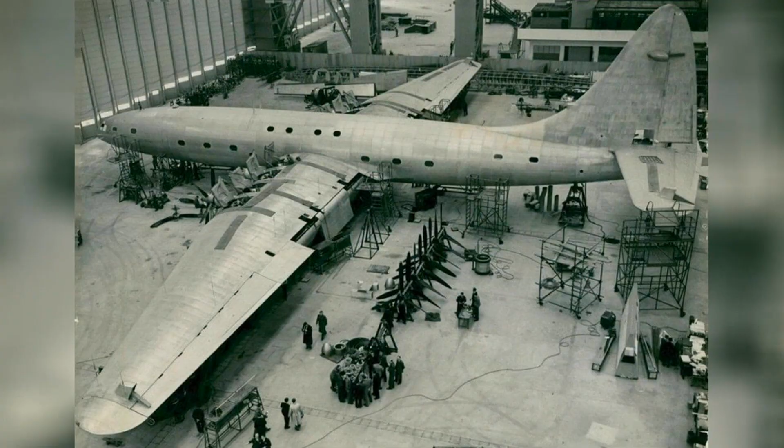The £34 million machine would sell not a single commercial ticket. The problem lay not in assembly defects, but in blind faith in the wrong mathematics.

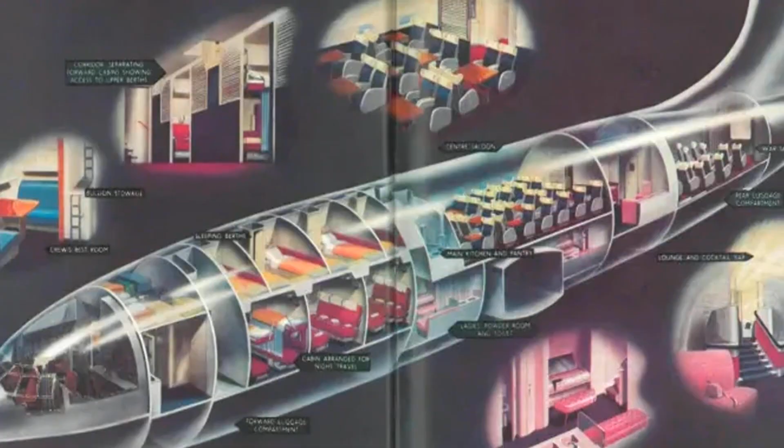In 1942, when Nazi bombs were still falling on the industrial districts of London, head of the government committee John Moore Brabazon received an order to design the post-war British civil fleet. Moore Brabazon, an aristocrat and aviation pioneer, viewed future traffic flows through the lens of pre-war luxury, ignoring the dry economics of costs. In his picture of the world, non-stop transatlantic flights from London to New York were to become the aerial equivalent of ocean liners.

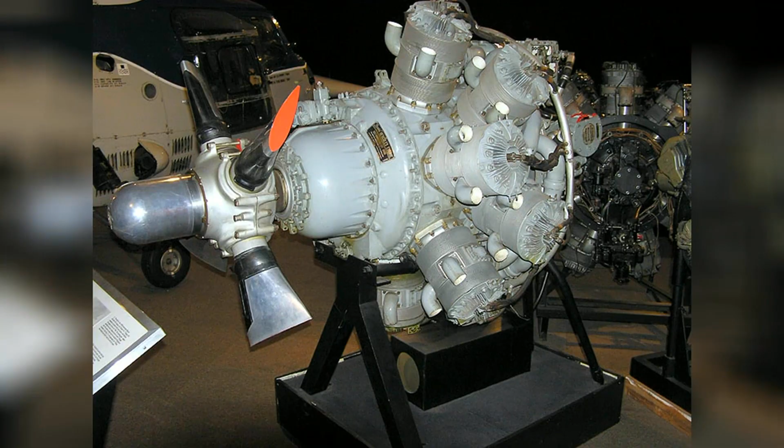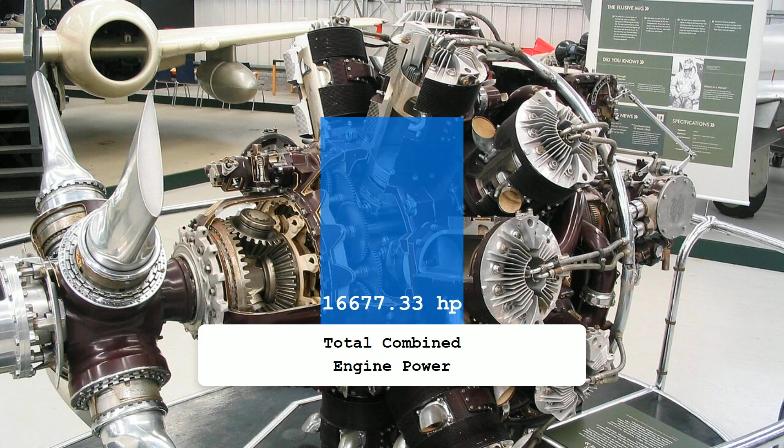The committee approved a specification that called for a giant pressurized tube with a volume of 25,000 cubic feet. Inside the fuselage, it was planned to place sleeping cabins, a full cinema, a bar, and a dining promenade. For 145 tons of takeoff weight, Lord Moore Brabazon allocated a quota of only 100 passenger seats, and this monstrous ratio of dead structural weight to useful commercial payload was financial suicide from the very start.

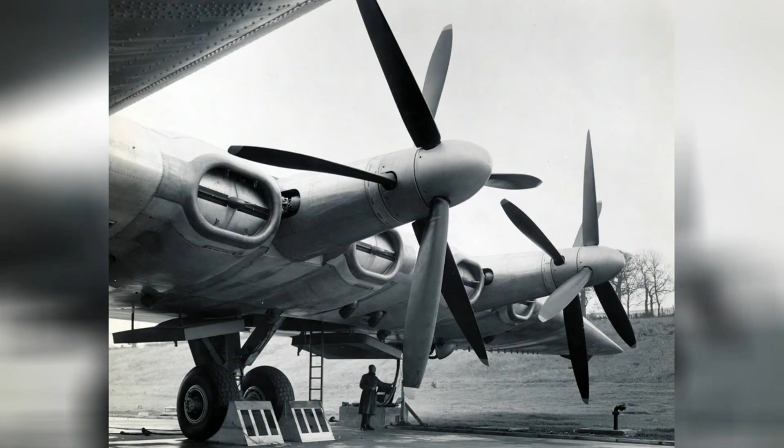Moving 145 tons of metal across the Atlantic Ocean in strong headwinds demanded unprecedented aerodynamic efficiency. Any air resistance forced the engines to burn extra gallons of fuel, and the additional fuel ate into the already meager commercial payload. The traditional layout, with massive engine nacelles hanging under the wing, created far too many turbulent eddies.

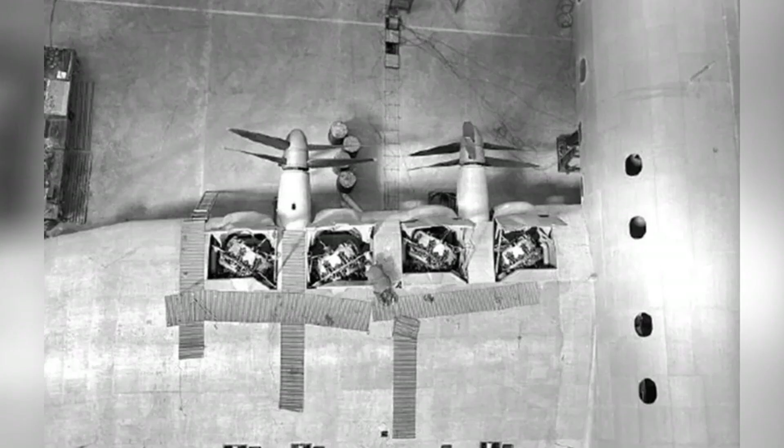The chief designer of the Bristol Aeroplane Company, Archibald Russell, faced an insoluble physical problem. He needed to obtain a total power output exceeding 21,000 horsepower, equal to the thrust of 36 modern supercars, yet keep the wing profile absolutely smooth. Russell adopted a technical solution that would later turn the maintenance inspectors of British Overseas Airways Corporation grey.

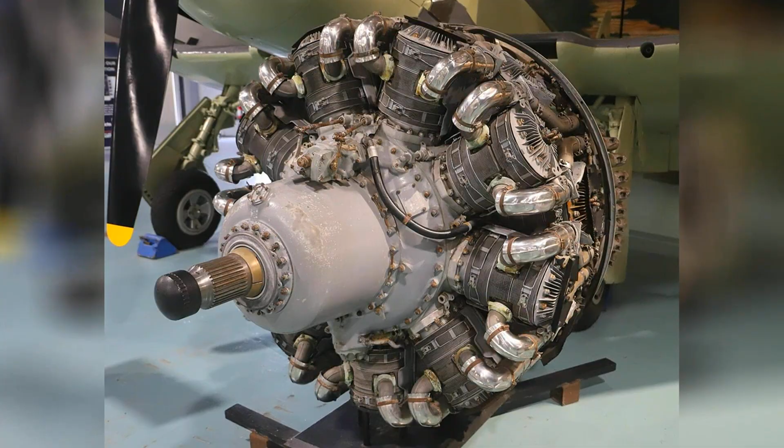He decided to bury all 8 huge radial engines completely inside the wing itself. And it was precisely this complex mechanism for transmitting colossal torque from the hidden recesses to the propellers that would become the time bomb that turned an engineering triumph into a pile of scrap metal.

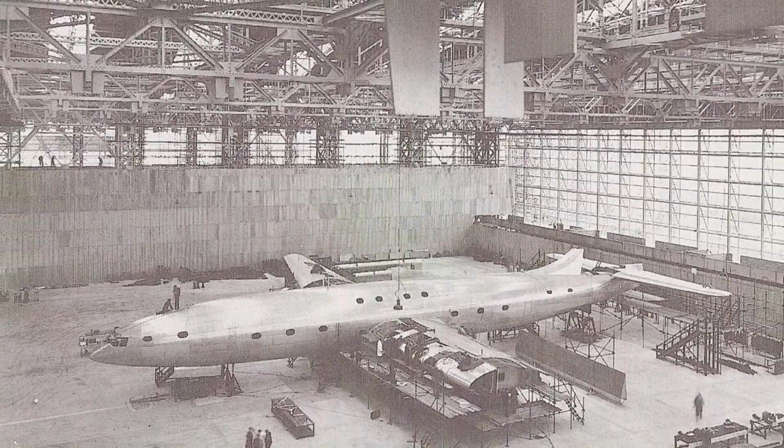Archibald Russell looked at the drawings of a wing profile with a span of 70.1 meters. This distance exceeded the length of a football field and the dimensions of the future Boeing 747. To push through the dense layers of air, a fuselage containing 700 cubic meters of empty space required colossal thrust.

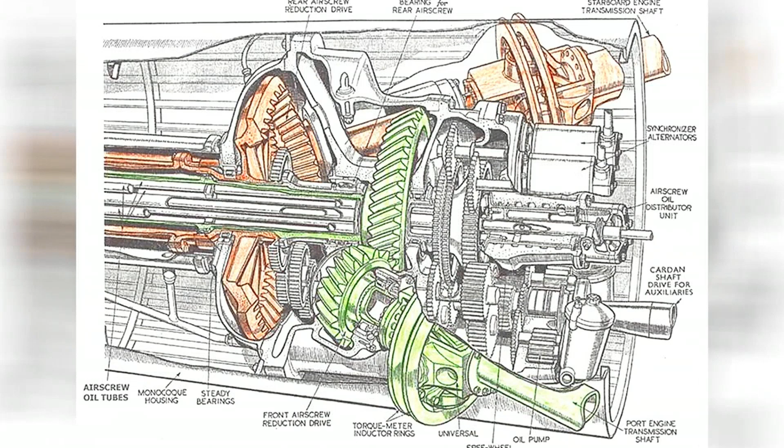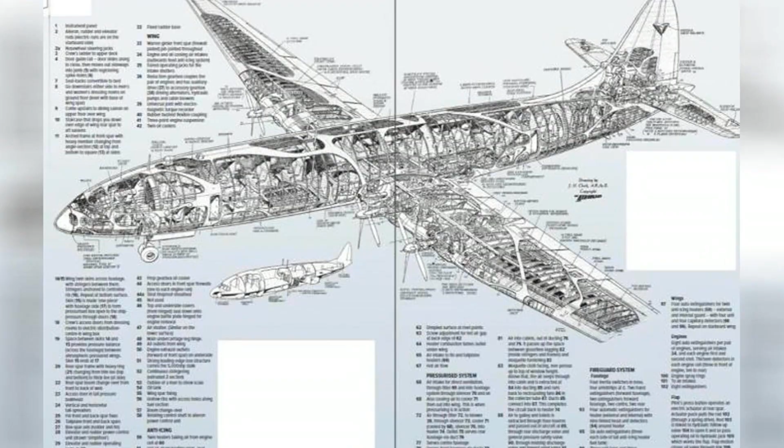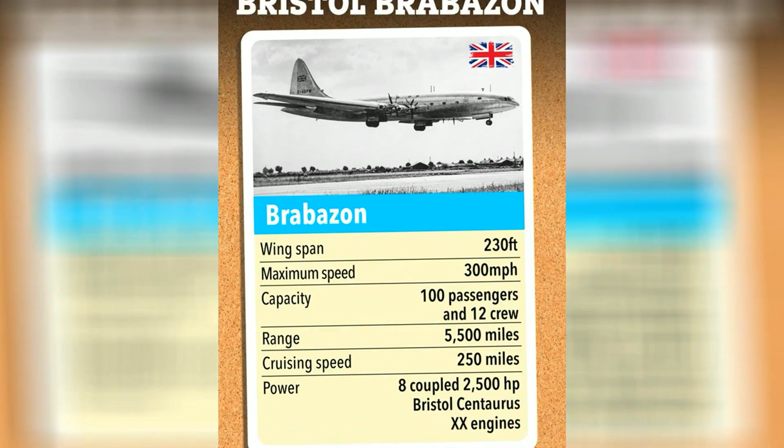Russell chose the Bristol Centaurus 20, 18-cylinder air-cooled radial engines. Each delivered 2,650 horsepower. 8 gigantic units together generated 21,200 horsepower. But they could not simply be hung on external pylons. The traditional layout created aerodynamic drag that forced the engines to burn tons of extra fuel, and fuel directly destroyed the paying commercial payload. Russell made a radical decision.

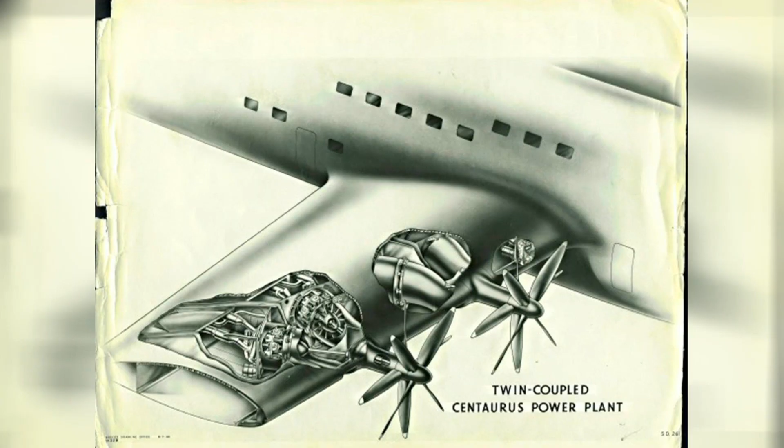He buried these steel consumers of high-octane aviation gasoline deep inside the root section of the wing. The engines stood at angles to one another, forming 4 paired sections. All this primitive mechanical power converged at one point, in a central gearbox weighing several tons.

This complex transmission unit received torque from two independent crankshafts and delivered it to 4 pairs of coaxial contra-rotating propellers. From an engineering standpoint, it was a kinematic masterpiece. The coaxial propellers canceled out the reaction torque and provided ideal directional stability in the event of an engine failure during takeoff. Yet inside the wing, there formed a genuine thermal and mechanical hell.

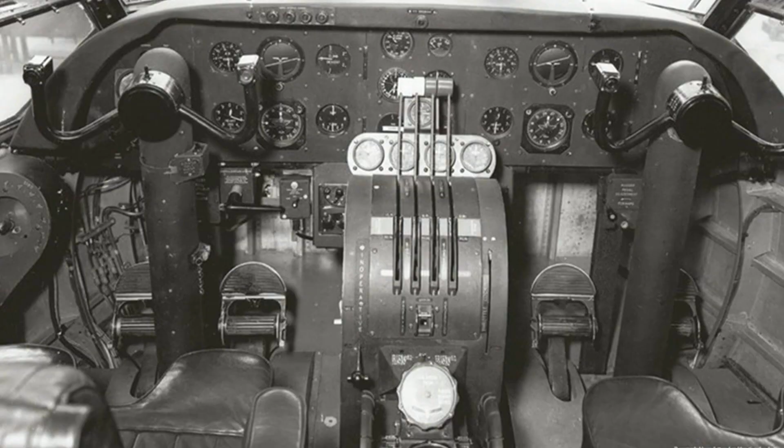144 cylinders produced a monstrous amount of thermal energy. To keep the engines from melting themselves and the load-bearing duralumin spars, Russell laid an intricate network of internal air intakes, controllable shutters, and massive oil coolers. Each isolated engine bay was packed tight, with thousands of moving parts, hundreds of meters of hydraulic lines, and thick cables.

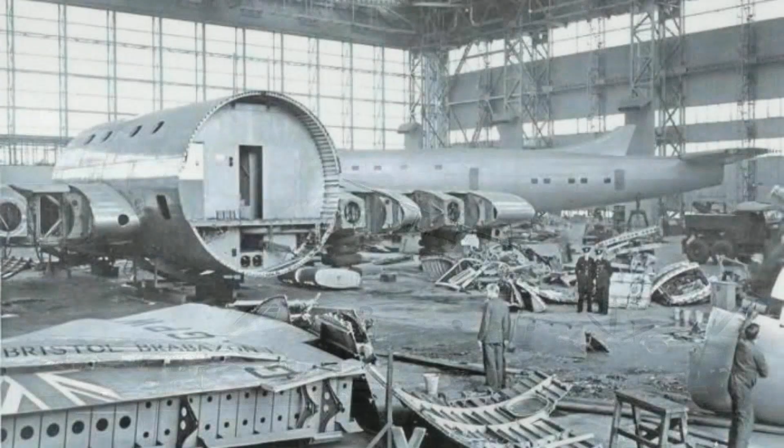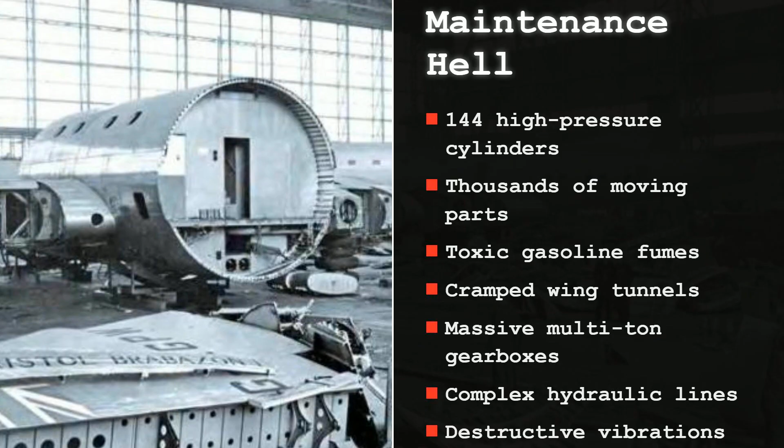Cables were squeezed between the primary structural members of the airframe. The metal vibrated continuously under maximum load, transmitting a destructive low-frequency rumble to the fuselage frames. The massive gearboxes demanded constant lubrication under extreme pressure. The slightest drop in oil pressure threatened instant gear seizure, rupture of the crankcase, and a catastrophic fire inside the confined space of the wing, where adjacent bays held thousands of gallons of flammable fuel.

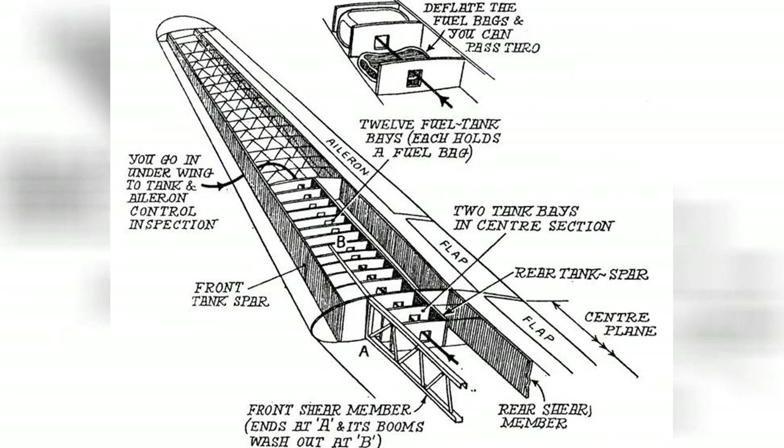While Russell celebrated victory over aerodynamic drag, the Engineering Directorate of British Overseas Airways Corporation studied the maintenance schedules for this Leviathan. The contrast between the flawless wing surface and the harsh reality of ground operations proved to be a death sentence. Under the conventional layout, a mechanic rolled up a ladder, opened the cowlings of an external nacelle, and gained direct physical access to the cylinders and carburetors.

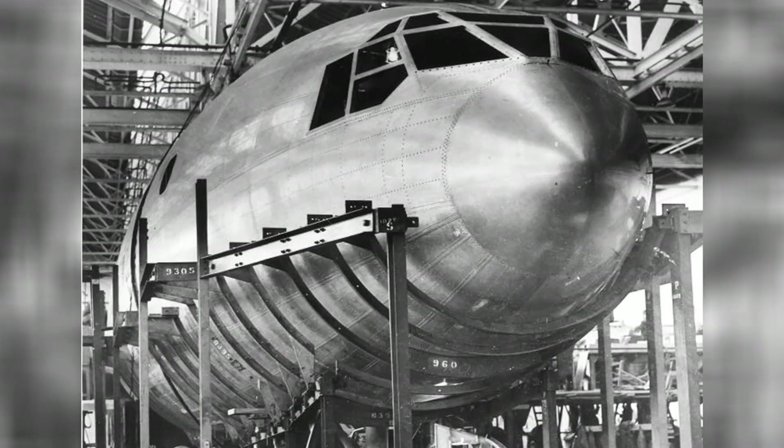To replace burned-out spark plugs on the Bristol Brabazon, a technician faced an exhausting journey deep into the structure. Engineers had to crawl through narrow, dark maintenance tunnels, past the sharp edges of the ribs, dragging heavy tools behind them. They worked in a cramped space saturated with toxic fumes of gasoline and acrid engine oil.

Any serious failure requiring complete engine removal or major gearbox overhaul turned into a major surgical operation. Mechanics had to take off large load-bearing skin panels and use special internal hoists to extract the multi-ton unit without fatally damaging the entire wing structure.

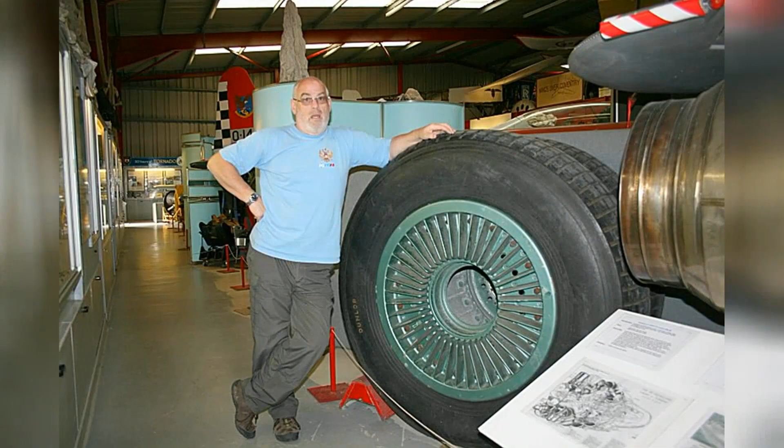In commercial aviation, an airplane earns money only when its landing gear leaves the concrete of the runway. Every minute on the ground is a direct financial loss. The accountants of British Overseas Airways Corporation quickly translated Russell's brilliant engineering compromise into cold columns of figures. Scheduled maintenance of the 144 cylinders and 4 double transmissions hidden inside the wing quadrupled the standard ground inspection time compared with ordinary transport aircraft.

The airplane risked spending long weeks in repair hangars over the slightest leak from a rubber seal or a microscopic crack in a pipe. Depreciation of the machine's colossal cost was spread across a mere 100 tickets sold. And now this was joined by astronomical bills for hundreds of extra man-hours of work by highly qualified technicians. The ideal aerodynamics, for which maintainability had been sacrificed, did not offset even a small fraction of these costs.

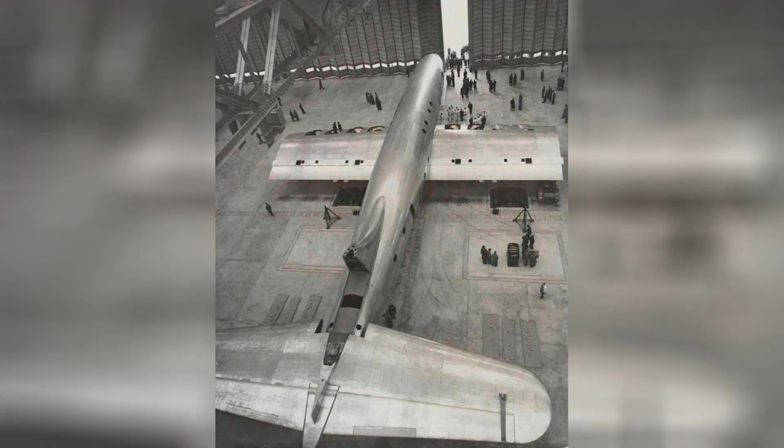Add to this the world's first hydraulic power boost control system, moving the all-metal control surfaces with areas of dozens of square feet at a speed of 250 miles per hour - by the pilot's muscle power alone this was impossible. The innovative system worked flawlessly, but its massive pumps, rigid copper pipelines, redundant circuits, and heavy fluid pressurized to thousands of pounds per square inch added several more critical tons to the airplane's empty weight.

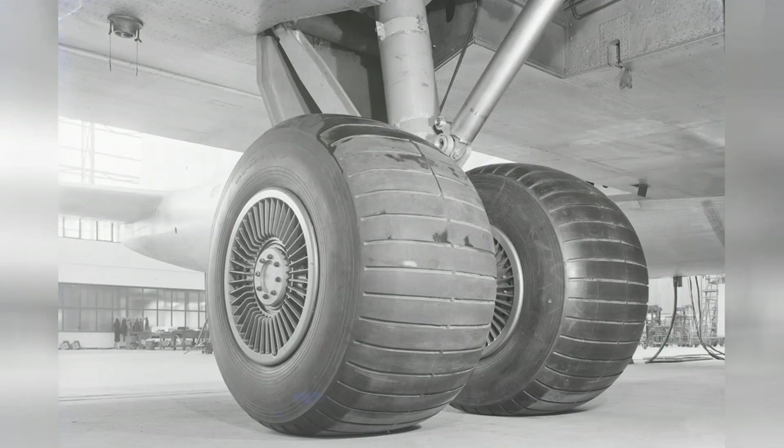The scale of the machine produced a geometric increase in mass, and every extra pound of weight destroyed potential profit without return. Heavy copper wiring bundles running the length of the fuselage, thick duralumin skin designed to maintain excess pressure inside the vast cabin, and ultra-strong landing gear legs consumed what remained of profitability. The pursuit of technical perfection turned the machine into a financial monster.

The rigid logic of detailed drawings defeated the physics of airflow, but surrendered completely to the merciless mathematics of transportation.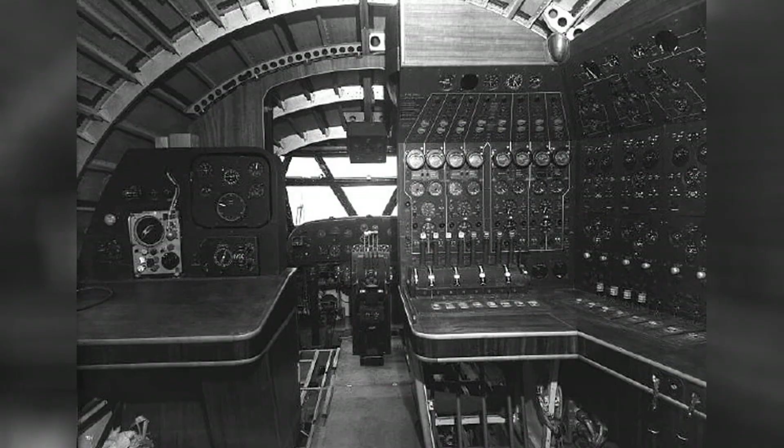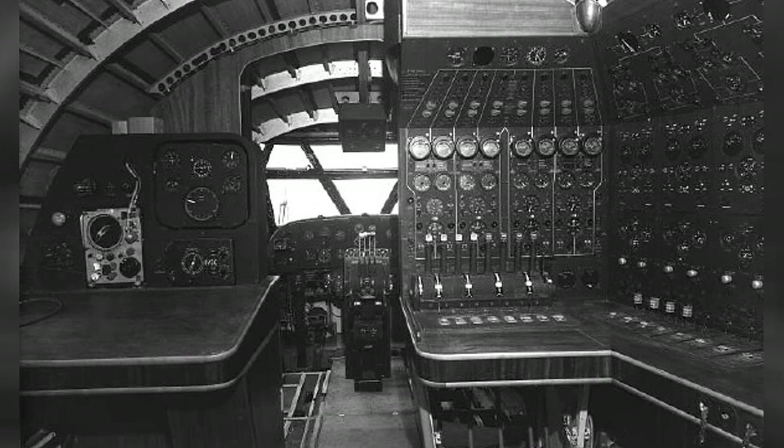On September 4, 1949, Chief Pilot Bill Pegg climbed the tall aluminum boarding stairs into the belly of the world's largest landplane. Behind him, there were neither the sleeping cabins, nor the panoramic cinema, nor the bar counters promised by the project. Throughout the entire colossal fuselage, with a volume of 25,000 cubic feet, reigned the cold emptiness of an industrial laboratory. Instead of 100 wealthy passengers enjoying cocktails over the Atlantic, Pegg carried behind him 1,000 measuring instruments.

A web of hundreds of miles of thick copper cables snaked along the bare duralumin frames, rigidly connecting strain gauges on the wing spars to complex oscilloscopes in the center of the cabin. Massive recorders absorbed second-by-second readings of vibrational loads, hydraulic pulsations, and temperature differentials inside the hidden engine bays. Mounting this complex instrumentation alone required thousands of man-hours of technician work.

It was not a luxurious Skyliner, but a 145-ton test rig for metal fatigue. Taxpayers paid £3.4 million for an illusion that on paper promised unheard-of luxury and turned out to be the echo of engineers' footsteps on bare, ribbed floors.

Bill Pegg settled into the left seat in the cockpit, whose width surpassed the dimensions of a standard London double-decker bus. Directly ahead stretched the concrete runway 7,900 feet long, for the pouring of which bulldozers had leveled the village of Charlton. Pegg placed his hand on the 8 throttle levers and smoothly advanced them. Deep inside the 230-foot wing, 144 forged pistons came to life simultaneously.

21,200 horsepower poured their monstrous torque into the complex transmission gearboxes. Eight coaxial propellers roared and bit into the damp autumn air. The low-frequency rumble passed through thousands of riveted skin panels, but thanks to the Leviathan's colossal mass, vibration in the crew cabin remained minimal.

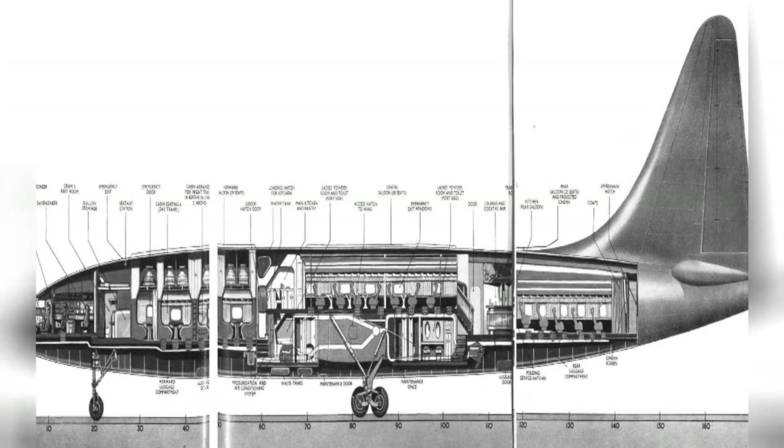The machine, with a maximum takeoff weight of 145 tons, lifted heavily from the concrete with frightening mechanical grace. The first fully hydraulic booster system operated flawlessly. The pilot did not have to fight the aerodynamic resistance of the huge all-metal control surfaces. The heavy, non-flammable fluid, pressurized to thousands of pounds per square inch, did the heavy work for human muscles.

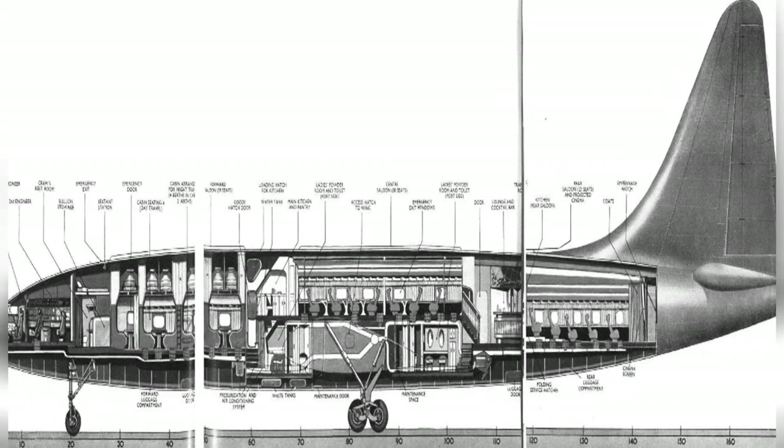Every movement of the ailerons generated enormous loads on the center section structural members, but the ingenious lever system compensated for the deformations. The historic flight lasted exactly 25 minutes. Upon returning to Earth, the chief pilot recorded not a single hydraulic failure, not a single drop in oil pressure, not a single pulsation in the transmissions. The giant piece of metal flew flawlessly.

In June 1950, the Bristol Brabazon passed with a deafening triumph over the runways of London's Heathrow Airport, and a year later demonstrated its power at the Paris Air Show in Le Bourget. Crowds of spectators gazed spellbound at the sky, convinced they were seeing the flagship of the future air fleet of the British Empire. The enormous silver silhouette, slicing through the air at a cruising speed of 250 miles per hour at an altitude of 25,000 feet, seemed an indisputable embodiment of British engineering genius.

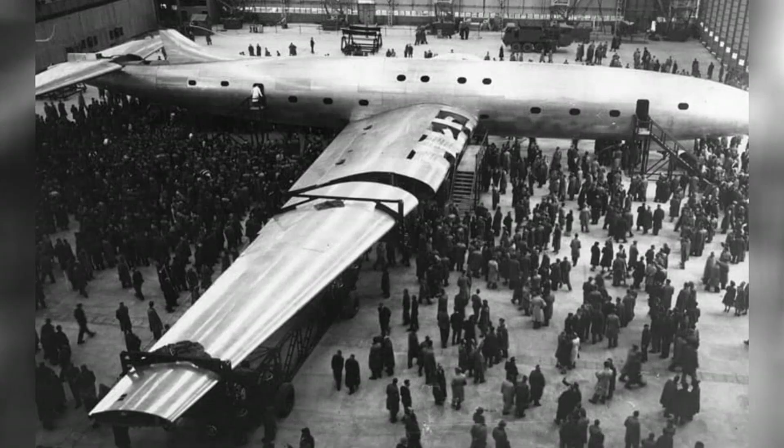But while the morning newspapers printed rapturous headlines, in the offices of the Ministry of Supply and at the headquarters of British Overseas Airways Corporation, a brutal collision with reality was taking place. Profitability was measured not by loud applause from the crowd, but by the cost of every gallon of fuel burned per ton of useful payload. The airline's financial directors and analysts looked not at the flawless contours of the fuselage, but at the cold columns of commercial operating metrics.

They already knew precisely what was being carefully hidden from the jubilant public: this perfect mechanism would never enter regular passenger service. Economic mathematics had delivered a verdict that left no chance of saving the project. To grasp the true scale of the impending financial catastrophe, the leaders of British Overseas Airways Corporation only needed to divide the airplane's takeoff weight by the number of tickets sold.

145 tons of alloyed aluminum, copper, and steel had to rise into the air, burning tons of aviation gasoline in order to carry just 100 people across the ocean. To achieve break-even on a flight, tickets for the Bristol Brabazon would have to cost three times more than those on competitors' flights. But even that sky-high price could not have covered the monstrous costs of maintaining the radial engines hidden inside the cramped wings.

Every extra pound of weight inexorably took precious pounds sterling out of the carrier's pocket, turning the transatlantic route into a budgetary black hole. Lord Moore Brabazon's elitist concept, which naively assumed that air travel would remain the privilege of a super-rich aristocracy demanding private berths on board, shattered against the laws of the market. The new reality demanded extremely dense seating arrangements and high flight frequency.

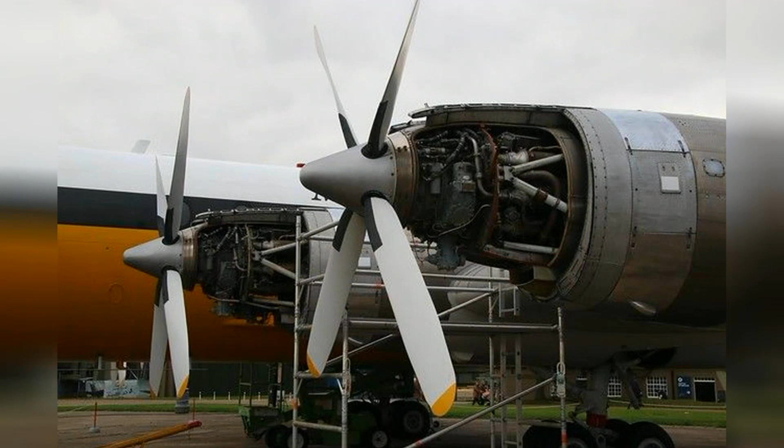On paper, the turboprop giant looked like the last real hope of recovering the millions of pounds sterling invested in infrastructure and development. Inside the giant assembly shop in Filton, under a roof covering 8 acres, the riveted skeleton of a new, enormous fuselage was already taking shape, into which hundreds of tons of scarce alloyed duralumin had gone. But the dry financial analysis that the corporation's chief accountant placed on the table in front of Miles Thomas left no room for illusions.

Even with the new engines, the giant airplane remained hostage to its absurd concept. Replacing piston cylinders with rapidly spinning gas turbine blades had not changed the machine's fundamental flaw. 700 cubic meters of pressurized volume were still intended to carry a tiny handful of people.

Sir Miles Thomas took a fountain pen in his hand and drew a line through the most expensive British aviation project. He officially notified the Ministry of Supply that British Overseas Airways Corporation categorically refused to purchase either the piston-engined first model or the unfinished turboprop second model.

This was not an act of sabotage. It was an inevitable capitulation before the harsh laws of economics.

By this time, the de Havilland Comet was already roaring through the sky, the world's first commercial jet airliner. It weighed 3 times less than the unwieldy 145-ton Bristol Brabazon, sliced through the stratosphere at 500 miles per hour, and carried a tightly packed load of 36 passengers, delivering incredible commercial turnover per flight. The future belonged not to luxurious flying palaces with sleeping cabins, but to narrow duralumin tubes with dense rows of seats in which people were willing to endure cramped conditions for the sake of speed.

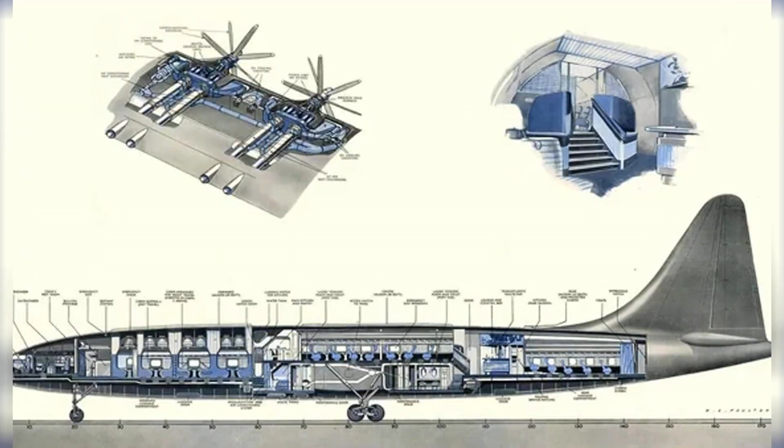Workers started the compressors, switched on pneumatic shears and heavy gas cutters. They began methodically destroying what had been the pinnacle of Archibald Russell's engineering thought. Sharp steel blades bit into the thick duralumin skin, forever tearing apart the perfect aerodynamic profile of the enormous 230-foot wing. The complex, massive central gearboxes, for which first-class technicians had crawled for days through the toxic confines of the internal engine bays, were roughly torn from the load-bearing spars and dumped onto the oil-stained concrete.

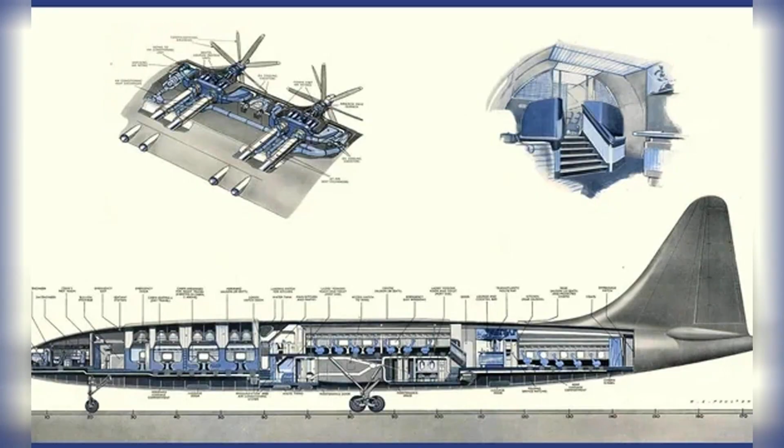Hundreds of miles of costly copper wiring, vibration-strain sensors, and precision measuring instruments were thrown onto piles of industrial waste. 8 giant Bristol Centaurus 20 radial engines, each rated at 2,650 horsepower, were sent to government storage as spare parts, while 145 tons of high-grade aircraft alloy were sold to scrap processors at the price of ordinary secondary metal.

In the neighbouring giant hangar, the half-assembled skeleton of the second turboprop version met exactly the same brutal fate. The point of no return had been passed, finally and irrevocably. Lord John Moore Brabazon's vision of a luxurious aerial ocean liner turned into a shapeless heap of cut aluminium. The only tangible legacy of the £34 million remained the colossal concrete runway,

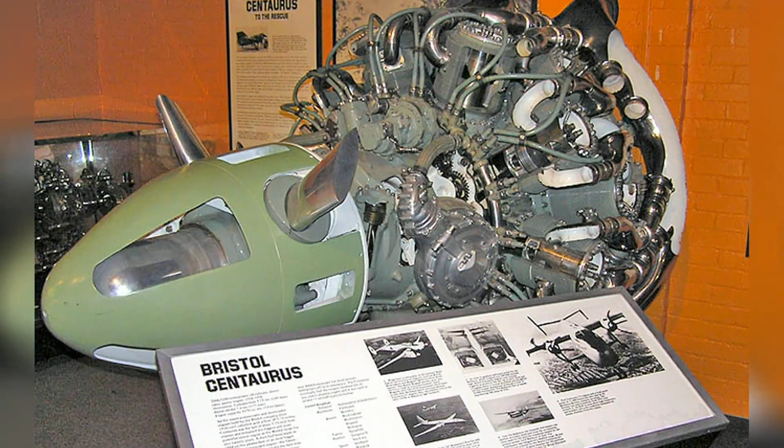7,900 feet long, on the site of the village of Charlton, that had been erased from the face of the earth, and the giant assembly shop covering 8 acres. By a cruel twist of fate, this massive and extremely expensive infrastructure proved highly useful.

Decades later, it was from this thick concrete that British supersonic Concorde airliners and heavy strategic Vulcan bombers would take off. The Bristol Brabazon project was ruthlessly wiped from the face of the earth, leaving behind only the cold, mathematical conclusion about the end of an entire era.

Whitney Straight, managing director of British Overseas Airways Corporation, hated illusions. In 1950, his desk was piled with dry reports on fuel consumption.

Lord John Moore Brabazon's project called for a non-stop transatlantic flight, yet the physics of the atmosphere over the North Atlantic imposed harsh conditions. At an altitude of 25,000 feet, the jet stream prevailed, a dense flow of opposing westerly wind exceeding 100 miles per hour.

To punch through this wall of air, the 145-ton Bristol Brabazon had to deliver maximum cruise power. 8 Bristol Centaurus 20 radial engines, hidden inside the cramped wings, ran on high-octane gasoline. Each of the 144 pistons required continuous injection of the mixture.

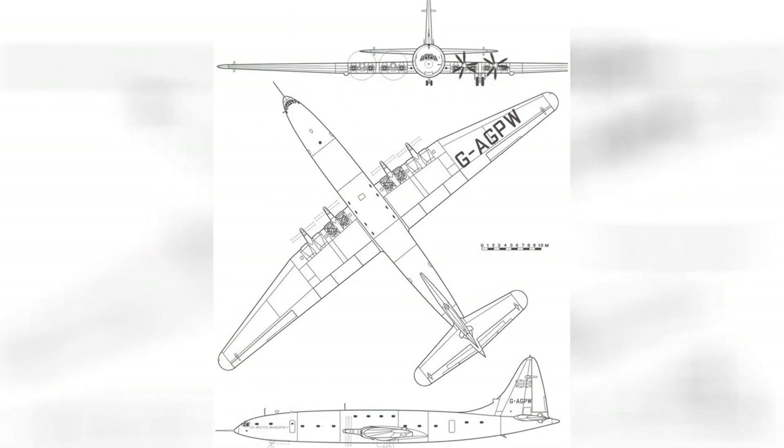The engineering tragedy lay in the square-cube law, which chief designer Archibald Russell could not override with brilliant drawings. The government committee's requirement to create spacious halls with a volume of 25,000 cubic feet inside the fuselage forced the designers to increase the diameter of the airplane's cylindrical tube to 25 feet.

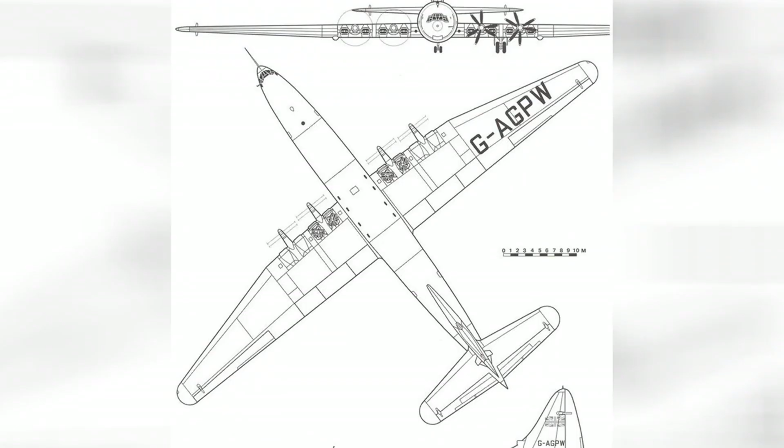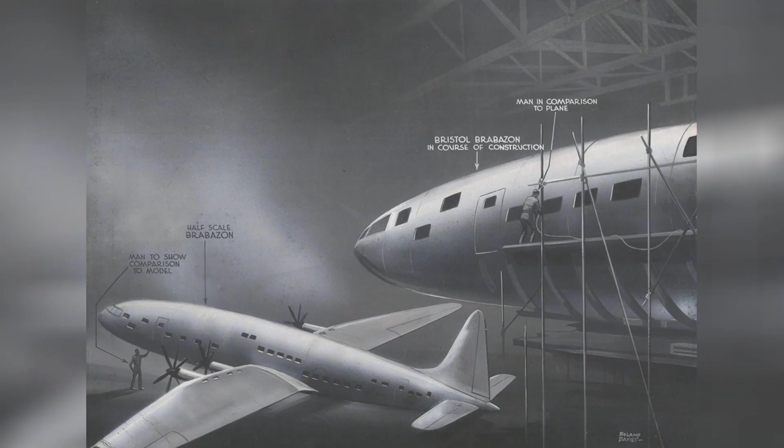At high altitude, atmospheric pressure drops by more than half compared with sea level. To prevent passengers from losing consciousness from hypoxia, compressed air had to be forced into the cabin by heavy compressors. The difference between the high internal pressure and the rarefied external environment turned the giant fuselage into an inflated metal balloon. The larger the diameter, the greater the tensile stress experienced by the skin.

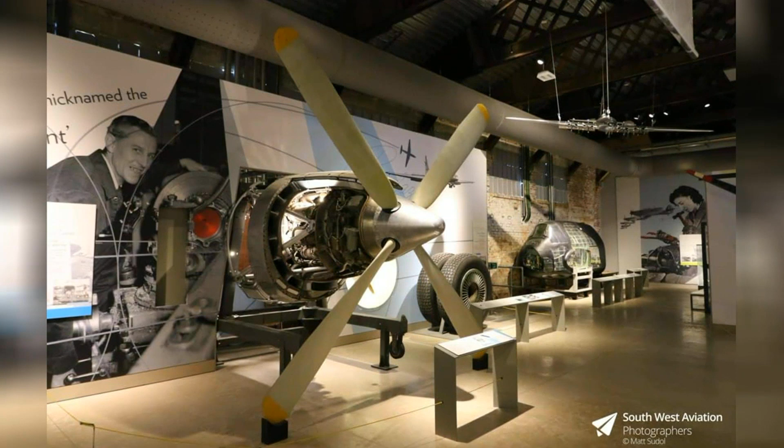Russell had to use thick sheets of alloyed aluminum and massive frames capable of withstanding the colossal cyclic loads during every climb and descent. The metal added tons of dead weight. If the engineers had reduced the fuselage diameter to the cramped dimensions of future jet airliners, they would have saved tens of thousands of kilograms.

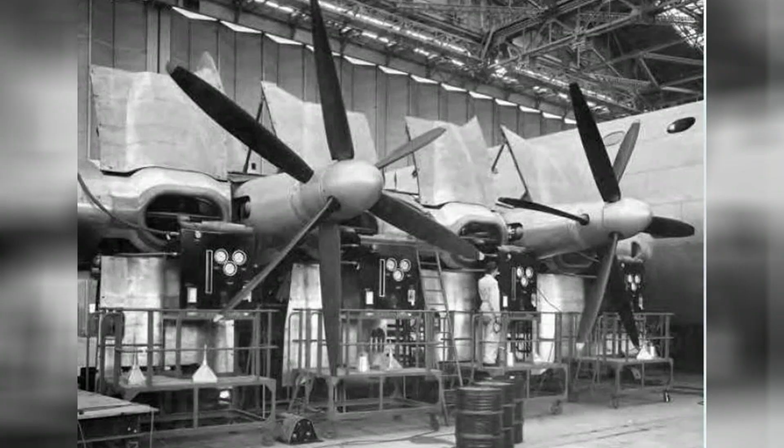But the specification demanded ocean liner comfort. As a result, the Bristol Brabazon became hostage to its own volume. Every square meter of internal luxury was converted into extra kilograms of heavy, load-bearing structures that forever destroyed the economic viability of operation. The only sphere in which the scale of the Bristol Brabazon worked to the benefit of world aviation was the rigid mechanics of control.

The only sphere in which the scale of the Bristol Brabazon worked to the benefit of world aviation was the rigid mechanics of control. A machine of such monstrous weight and wing area required, for the first time in history, the complete abandonment of direct muscle linkage between the control yoke and the control surfaces.

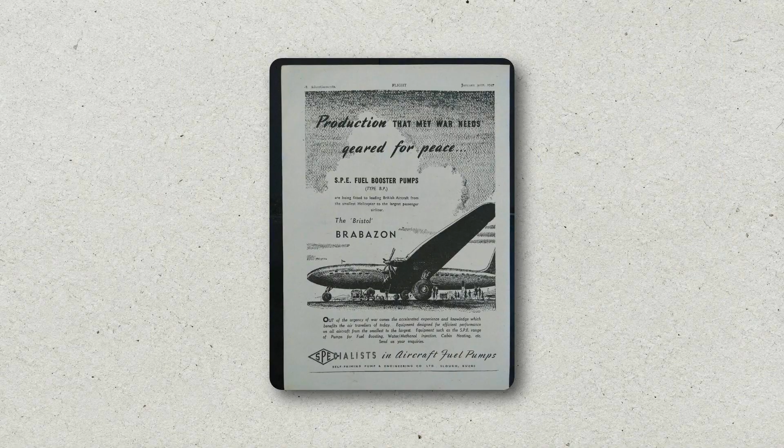The aerodynamic resistance of the massive all-metal ailerons at cruising speed was measured in tons. Chief pilot Bill Pegg would have been physically unable to alter the flight path. Engineers of the Bristol Aeroplane Company developed the world's first fully hydraulic power boost control system without mechanical backup.

This was a true engineering triumph hidden beneath the thick skin. Powerful piston pumps drove non-flammable fluid through dozens of meters of rigid copper lines. Pressure in the system reached thousands of pounds per square inch. When Bill Pegg moved the yoke, he only opened precision spool valves, while the actual force work was performed by massive hydraulic cylinders.

But this innovation created a deadly problem: a complete absence of feedback. The pilot could not feel the density of the air, and with one sharp movement of the yoke could exceed structural loads and tear off the wings. To prevent destruction of the airframe, the designers had to integrate an artificial feel mechanism for the yoke, simulating aerodynamic resistance with stiff springs. These developments became the gold standard for heavy jet aircraft.

But this breakthrough did not save the project's commercial insolvency. British Overseas Airways Corporation coldly calculated the cost of every hour of flight. The piston engines, overheated gearboxes, heavy hydraulics, and the enormous dead weight of the empty fuselage made operations unbearably expensive. The Bristol Brabazon was not a means of transport, but a flying financial paradox. It possessed advanced systems, but used them to serve an outdated logic of pre-war luxury.

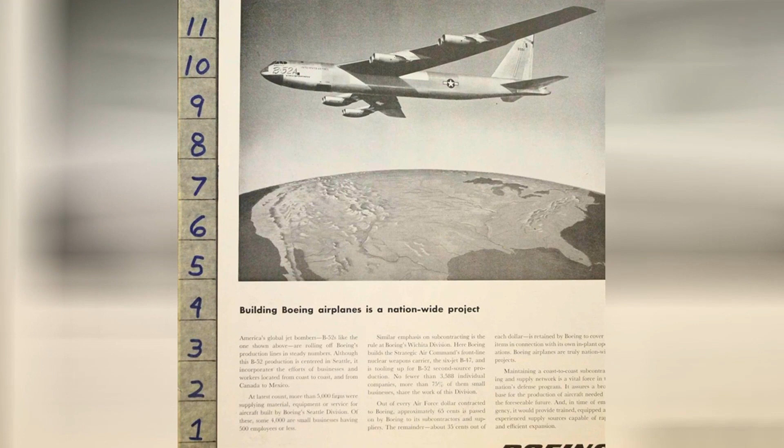The American engineering concept that Edward Wells was at that very moment embodying in the secret Boeing 367-80 project, the prototype of the future legendary Boeing 707, rested on an entirely different industrial physics. Wells took the heavy Pratt & Whitney turbojet engines out of the wing's load-bearing structure and suspended them on external aerodynamic pylons. The increased frontal drag of the massive nacelles was more than offset by the enormous thrust of the turbines, yet any ordinary mechanic with a basic wrench gained direct physical access to the compressor blades within minutes. A simple engine change took a few hours rather than long, exhausting weeks.

While British engineers tried to preserve ideal laminar flow at the cost of maintainability, the Americans made a ruthless bet on speed of servicing and maximum daily flying hours. Edward Wells understood perfectly that a commercial airplane generates direct losses every second it spends in the hangar, and his external pylons permanently solved the problem of access to the units.

While aircraft engineers argued themselves hoarse over the placement of power plants, the president of the powerful airline Pan American World Airways, Juan Trippe, coldly counted the money. Trippe tightly controlled the most profitable transatlantic routes and viewed the British government project solely through the prism of the cost per passenger kilometre. In the Bristol Brabazon's technical specification, Trippe saw only a 145-ton riveted aluminum structure that burned thousands of gallons of expensive high-octane aviation gasoline simply to move 100 people across the Atlantic Ocean. In the mathematical reports of his financial analysts, this monstrous ratio of dead weight to useful commercial payload spelled inevitable bankruptcy on the very first scheduled flight.

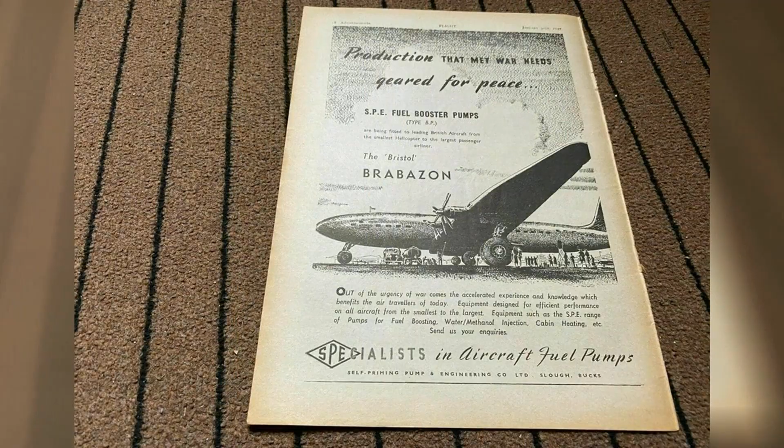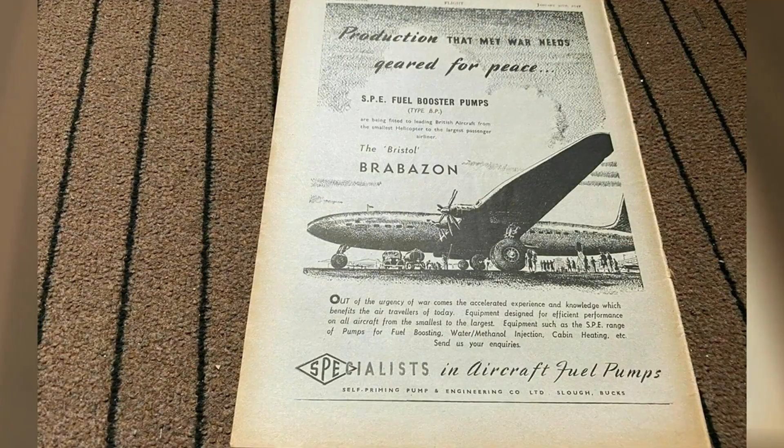The Boeing 707 he ordered, at a comparable maximum takeoff weight, carried up to 189 passengers. Juan Trippe forced the designers to remove every unnecessary bulkhead, reduce seat pitch to the absolute minimum, and use light duralumin alloys to create a dense passenger capsule.

Juan Trippe coldly killed the illusory concept of aerial ocean liners with a single stroke of his fountain pen on a multi-million-dollar check to the Boeing Corporation, mathematically proving that the post-war market demanded nothing but mass transportation.

Meanwhile, in Britain, chief designer of the Bristol Aeroplane Company, Archibald Russell, desperately tried to salvage £34 million of government investment. He initiated a second radical variant, the turboprop Bristol Brabazon Mark II.

Russell made the difficult decision to discard the temperamental piston engines and install 8 paired Bristol Proteus turboprop power units in the same wings. The new gas turbines were considerably lighter and delivered far greater useful power, yet the physics of the rigid structure originally laid down would not permit correction of the fundamental error.

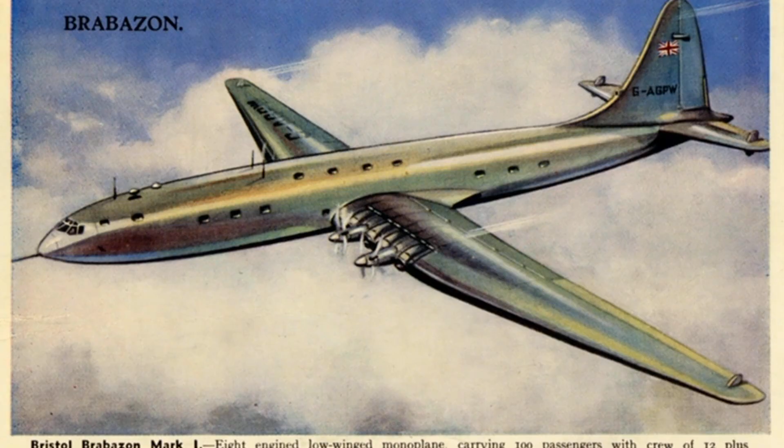The basic architecture of the giant fuselage, more than 16 feet in diameter, remained unchanged. Russell could not physically reduce the pressurized internal volume of 25,000 cubic feet without completely redesigning the entire airframe structure from scratch. This meant the new turbines would have to expend colossal thermal energy simply to keep pushing an enormous empty space through the dense layers of the atmosphere.

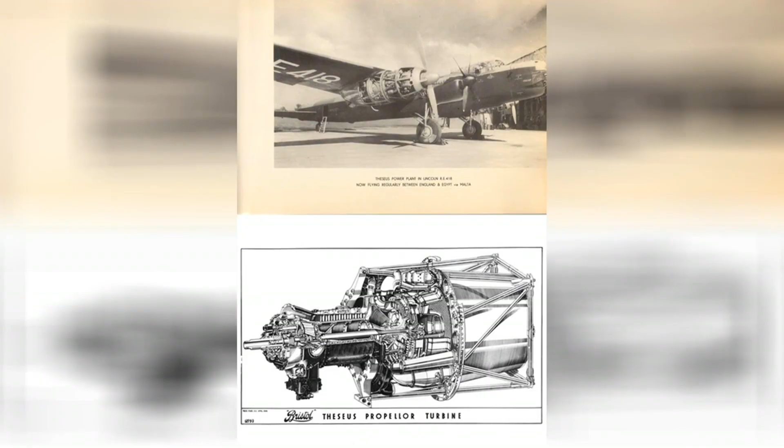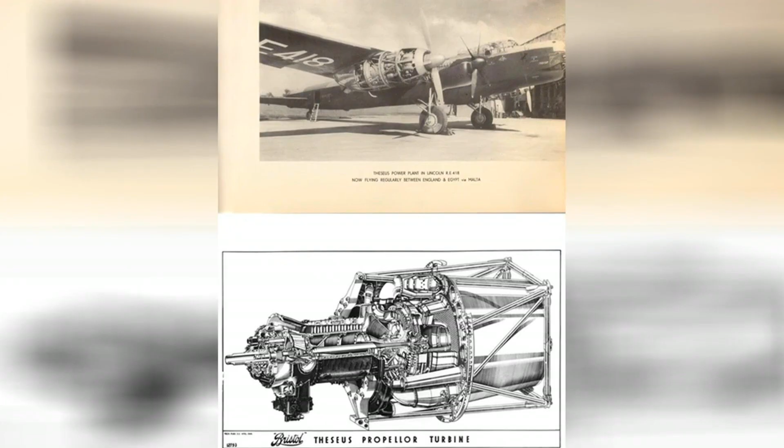The reduction in engine weight slightly increased the useful commercial payload, but the Ministry of Supply's finance department placed before Russell the merciless columns of calculations. The turboprop giant still lost catastrophically to American narrow-body aircraft in raw profitability.

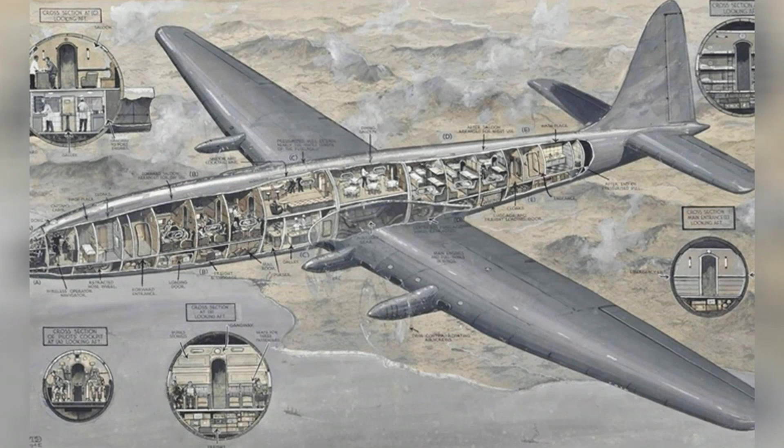Fatigue in the alloyed metal of the massive frames, caused by the constant cyclic pressurization of the huge cabin, required the external skin to be thickened, which once again consumed every kilogram saved by the turbines. The mechanics of the enormous coaxial propellers, driven by high-speed turbines through complex reduction gearboxes, remained an absolute nightmare for maintenance.

Archibald Russell remained shackled by the original flawed specification of the government Brabazon Committee, which proved to be a heavy slab of concrete around the neck of British aviation.

The final act of this protracted engineering drama played out not in the skies over the Atlantic Ocean, but in the quiet offices of the accountants of British Overseas Airways Corporation. The head of the Fleet Strategic Planning Department sat silently, staring at material fatigue graphs and price lists for transmission spare parts.

British heavy industry had spent an entire decade creating the perfect aerodynamic profile of the giant wing, completely ignoring the harsh, cold reality of daily hangar maintenance and pressurization cycles.

The ruthless decision to send the single airworthy prototype under gas cutters for scrap at the price of secondary aluminum alloy was the most logical and justified financial action the British government took throughout the entire life of the project.

The aluminum skin sheets, precision steel gearbox shafts, and copper hydraulic lines were quickly melted down. The village of Charlton, mercilessly bulldozed from the face of the earth to allow this 145-ton Leviathan to take off, was never rebuilt.